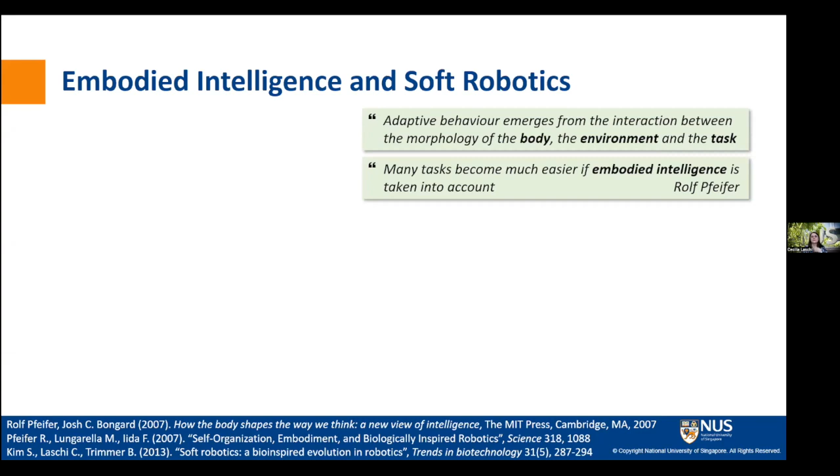My talk is about embodied intelligence and its relation with soft robotics, actually. I'm sure I don't need to define embodied intelligence too much in this community, but I just wish to recall the reasons why we consider it very interesting in robotics and why it is so important for soft robotics. And the reason for us is that if we consider embodied intelligence, adaptive behavior emerges from the interaction with the environment. So we don't have to program our robots too much. So many tasks become much easier if we take embodied intelligence into account.

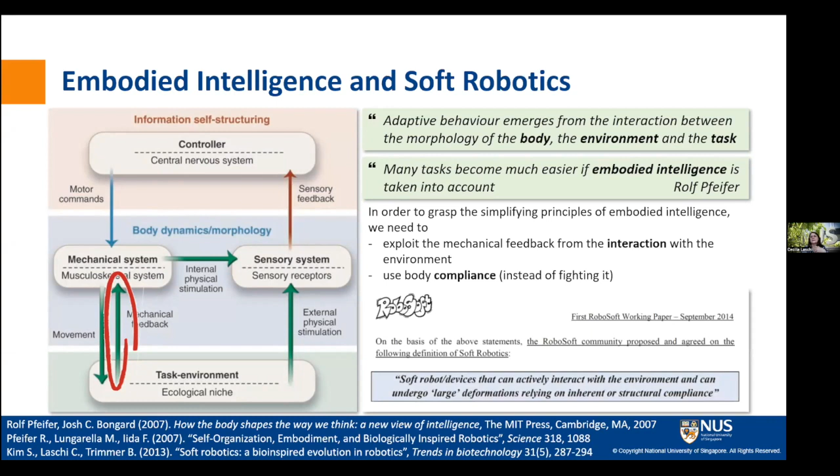And as Fumi already presented in an ideal sensory motor scheme in a robot, the important part, if we consider embodied intelligence, is the blue one. And especially this arrow, which is the mechanical feedback from the environment. So in robotics, in order to grasp this, we need to be able to use this interaction from the environment. So we need some compliance in the robot body. And this is what led to soft robotics, actually. So to robots that can undergo large deformations when they interact with the environment.

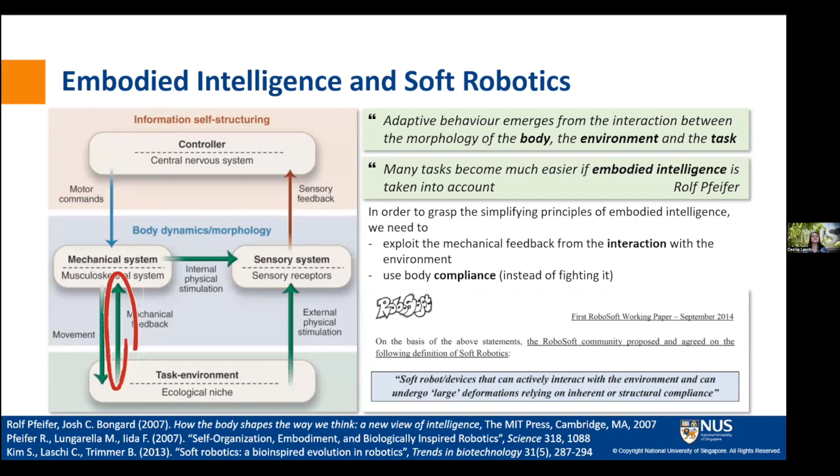And I also want to start with the summary from my first talk in this conference in the first edition, 2021. Actually, I called it Joys and Sorrows about the use of embodied intelligence in soft robotics, because I think there are a few trade-offs that we are still looking for in soft robotics when using embodied intelligence. For example, we know that embodied intelligence works in a specific ecological niche, and sometimes this niche is quite small for robotics. So the passive walker is the typical example that we use to explain this, but in robotics, we want our robots to do more tasks. So we need to be able to implement multiple ecological niches and also cognition in our robots.

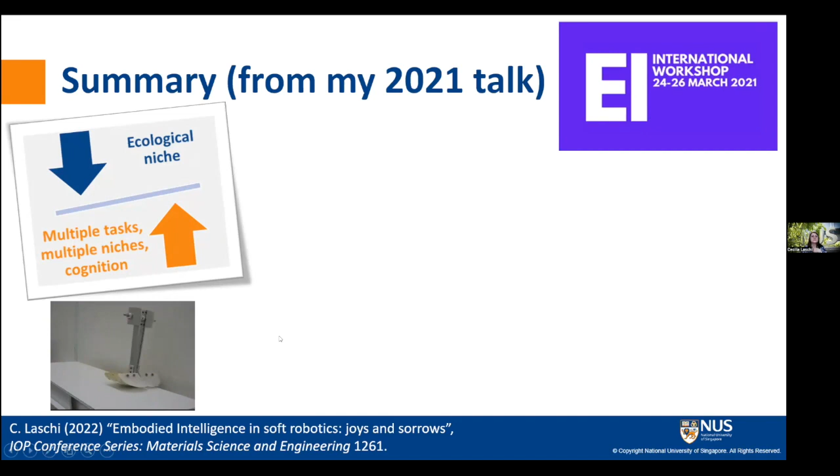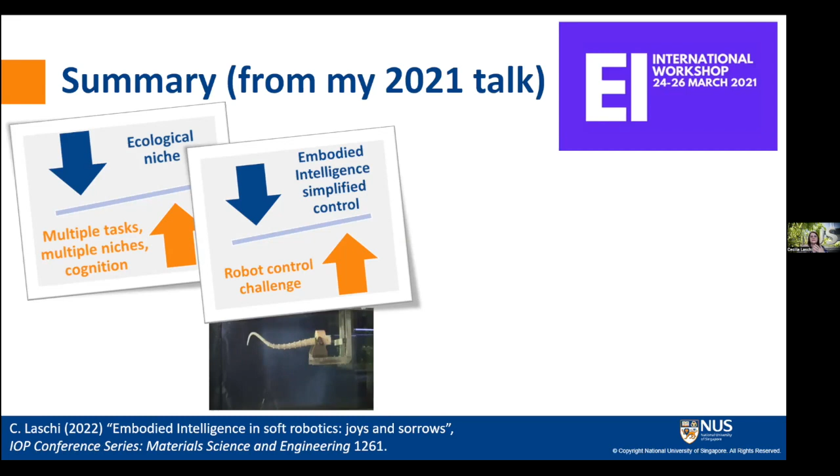On the other side, what's exciting in embodied intelligence is that we can simplify the control of our robots in terms of control parameters. But at the same time, as soon as we design a soft robot like this one, especially if it has an arm shape, we want to control it precisely. We want to control the end effector. So we say, okay, but it's difficult to control it in the traditional way. So this is also a trade-off that we need to find.

And then we said that we simplify the control of our robot behavior, the sensory motor behavior, I mean, but it works. The embodied intelligence simplification works if we take into account the morphology, the mechanical properties of the robot body, the interaction with the environment. So the design of the robot becomes more complex, in fact. And we still have a lot of nice principles for embodied intelligence, but not really an abstraction and mathematical description of them that we can use in robot design. So those principles are in most cases learned from biological models.

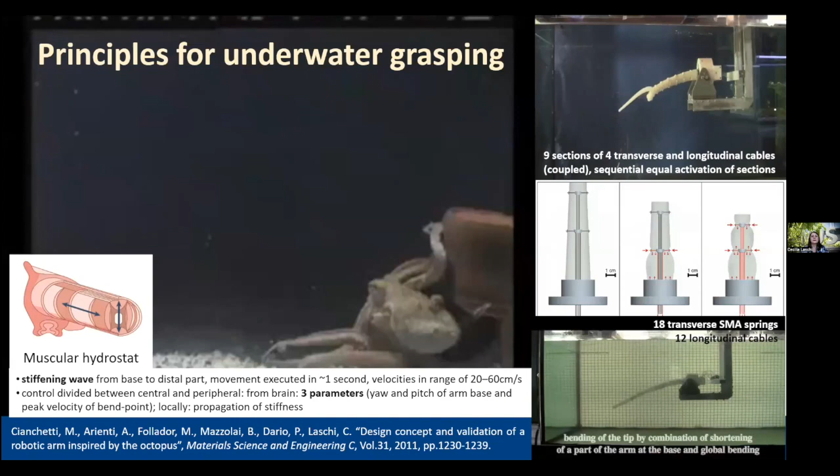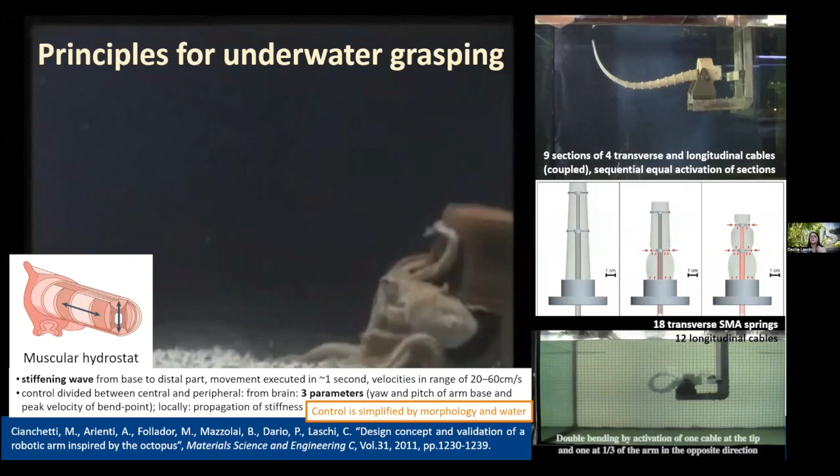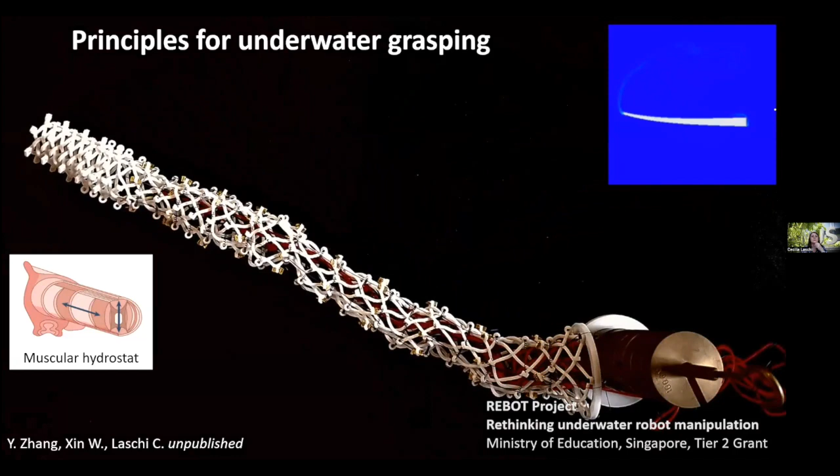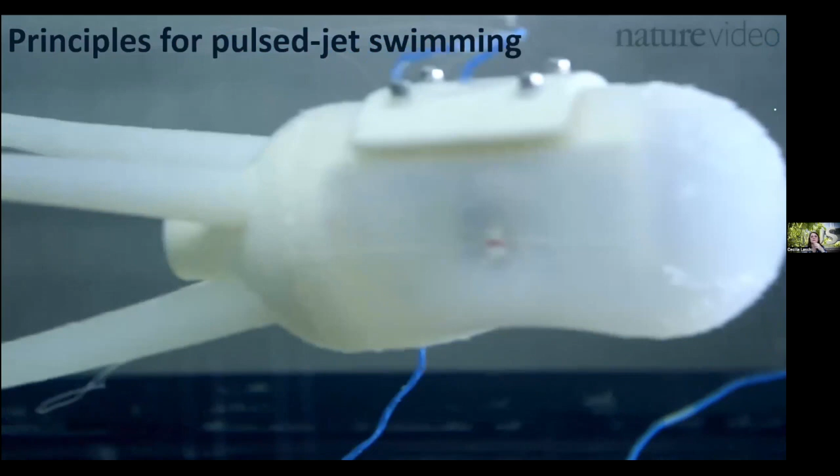So in my own research, we have been learning a lot from the octopus. For example, we found a nice principle for underwater grasping. It's a very efficient movement where control is very much simplified because of the interaction with water. And we are trying to demonstrate quantitatively how it works and how it happens. We learned about how we can walk underwater with legs and how we can swim with this pulse jet propulsion, which is very, very simple to control. Basically, control is really minimal in all those cases.

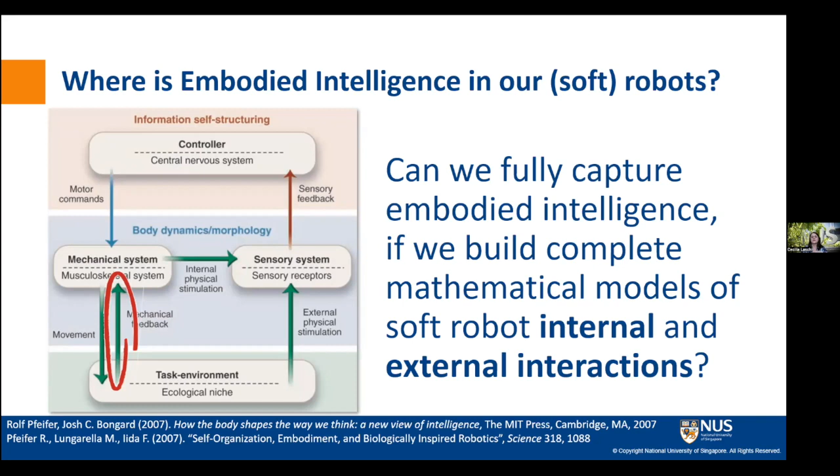So it's the model of the deformations given by actuators, but coupling them with external interactions and models of the external interactions. In a relatively simple case like our octopus here, there are already many challenges. The problems are multi-physics, multi-scale, and we want, as I mentioned, to couple internal interaction models, so what the actuator forces generate in the soft body, with external interaction models, so what the external forces generate in the soft body. And these external forces can come either from solid contacts or interaction with fluid, like in our octopus case.

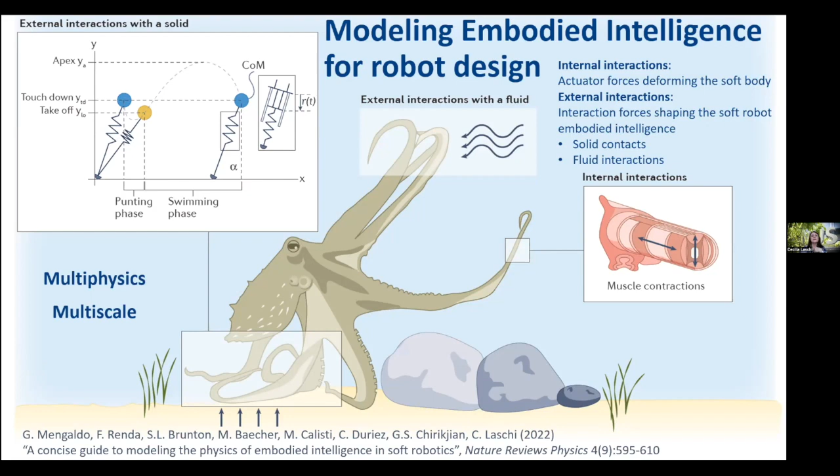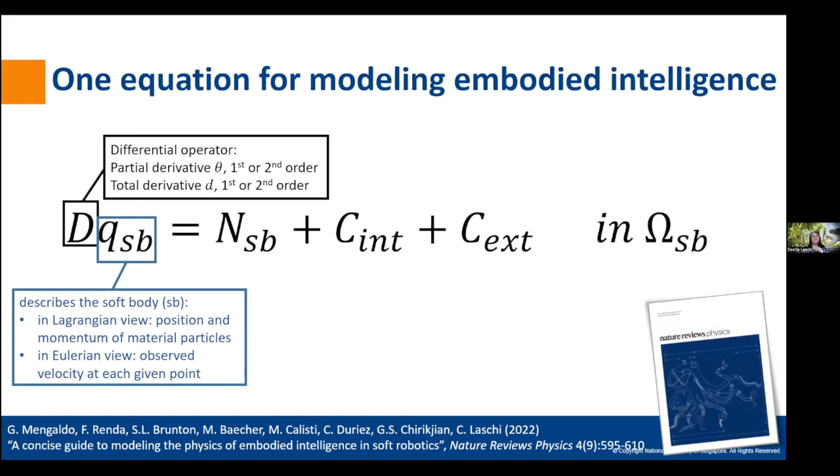So we think that actually we can try to put this into a very general mathematical framework where we just try to couple all these models. So we may describe what happens with soft robots with this differential operator, this term describing the soft body, with a nonlinear term that describes the mechanics of the soft body, and then two coupling terms.

So the first one accounts for internal interaction. So as I said, it's the action of actuators on the soft body. We are a little bit more familiar with that in robotics because this is what we need for implementing control in our robot. And this other coupling term instead accounts for external interaction. So as I said, either contacts with external solids, which is relevant for locomotion, for example, or grasping, or interaction with fluids like in swimming, all these in the soft body domain.

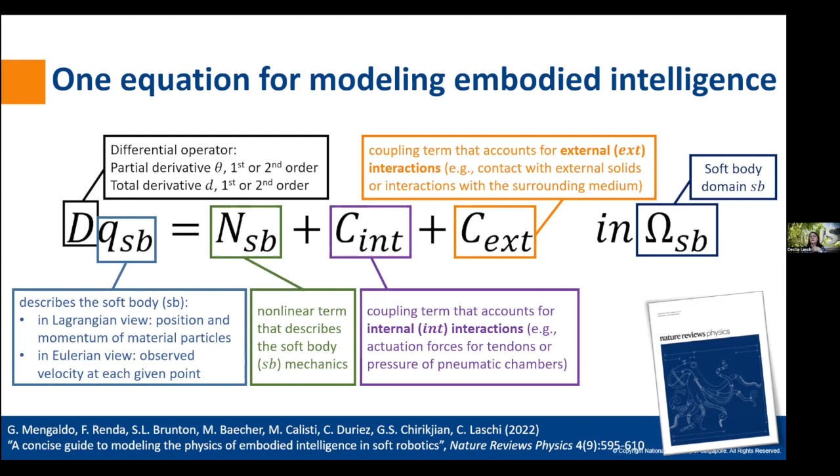So depending on the kind of approach that we want to use for developing such models, the terms in the equation assume different forms. But the message is that there are actually techniques that we can use, and generally speaking, they can either be in the realm of 3D continuum mechanics, or in the case of internal interaction, we can use other possible approaches like rod models or finite dimensional parameterization models.

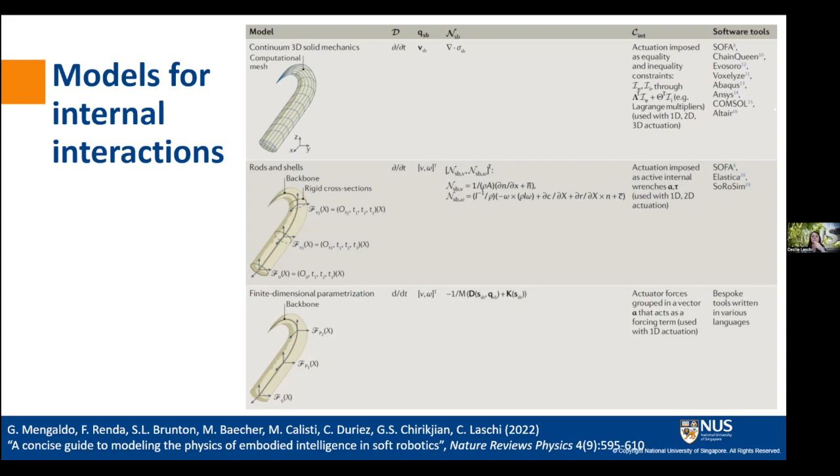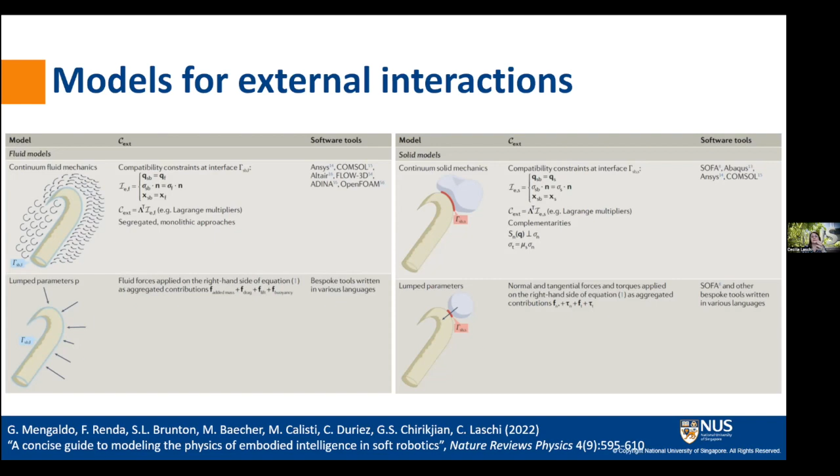For the case of external interaction as well, we can either take approaches in the realm of continuum, either fluid mechanics or solid mechanics, or approaches based on lumped parameters, again, in both cases where we sort of simplify and concentrate some key parameters in a few terms. So again, depending on the kind of approach we take, we can give a different form to the terms in our general equation, but actually it describes completely this coupling between internal and external interaction.

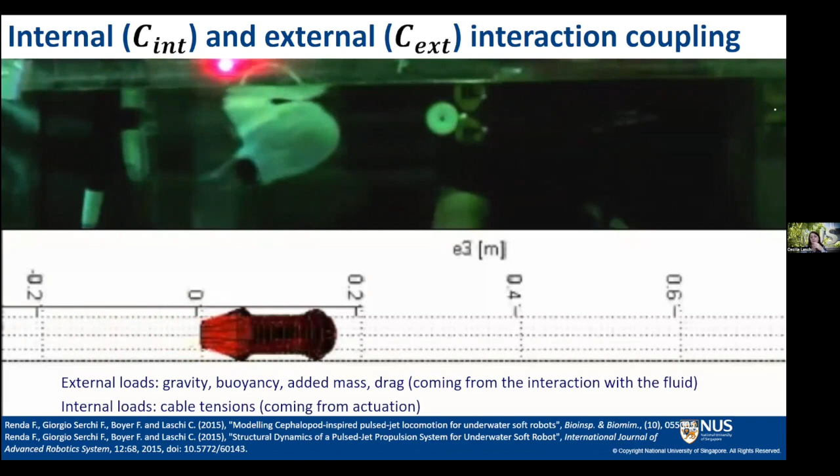And this is just an example. It's actually quite old, but here you see the coupling between the deformations given by actuators and the deformations given by the fluid dynamics, so the interaction with the fluid, and this is based on a lumped parameters approach. So all these can actually bring to model-informed design of soft robots that embed embodied intelligence.

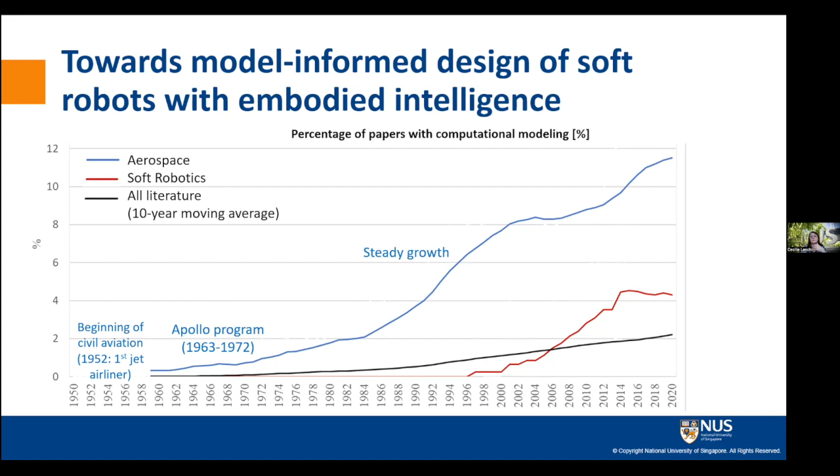The use of model-informed design, computational models, has been happening in other fields. What you see here is the percentage of papers with computational modeling in different disciplines. So aerospace is in blue. The black line is a reference for all literature, because the use of computational modeling has been growing in all disciplines actually. So in aerospace, we see that we have a growth, and this corresponds to a growth over the field itself, from the beginning of civil aviation to the Apollo program that gave a boost and brought a steady growth, up to the reality of today, where we have space tourism already, and really hundreds of thousands of civil flights every day.

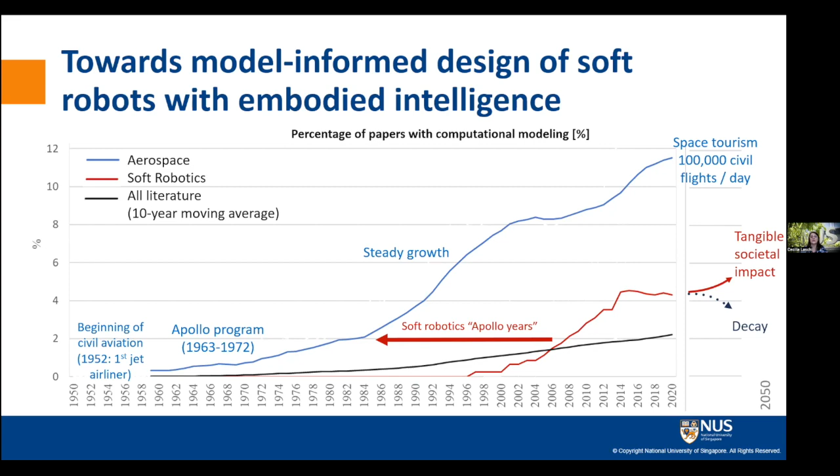So what I am arguing is that we may be at sort of the Apollo years for soft robotics if we can do this transition to model-informed design of soft robots, and then bring the discipline to a tangible societal impact, something that has been discussed in our community recently.

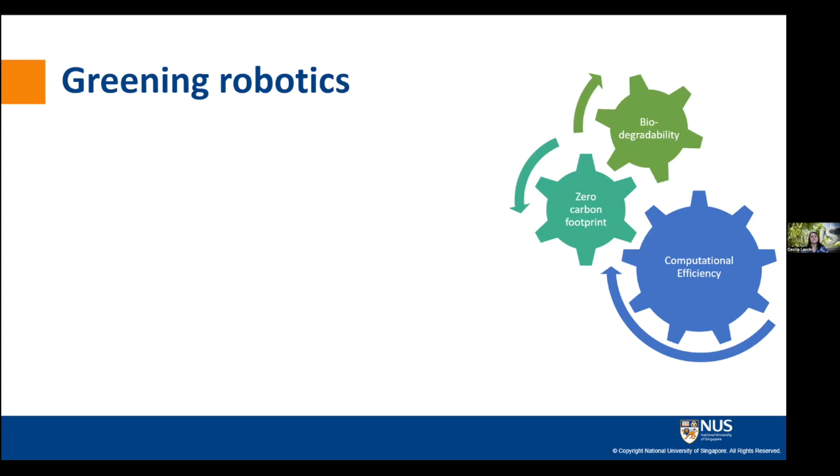There is also another aspect that I really like of the advantages in using embodied intelligence. I think that computational efficiency is really the very first step towards sustainability. We want to make robots more green and more sustainable, but I think that we tend to forget that digital processing computation has an energetic cost, and it has an impact on pollution. And if our robots are more computationally efficient, we can actually reduce their energy consumption. Nature gives us a lot of elegant, computationally frugal solutions, and embodied intelligence is definitely one of them.

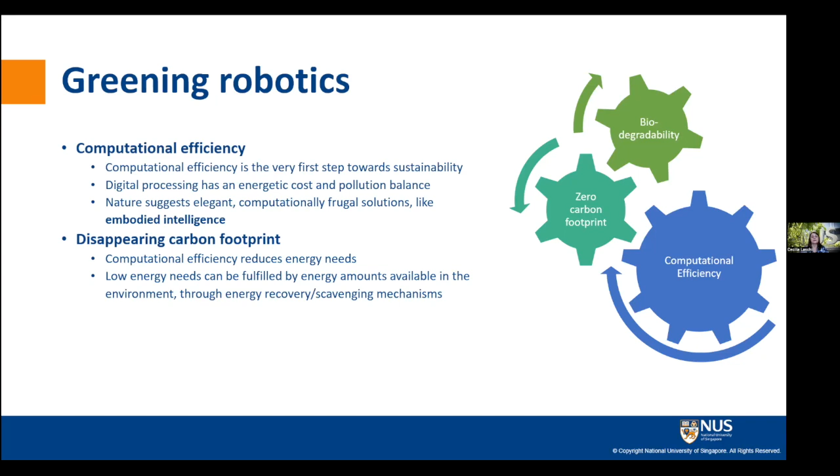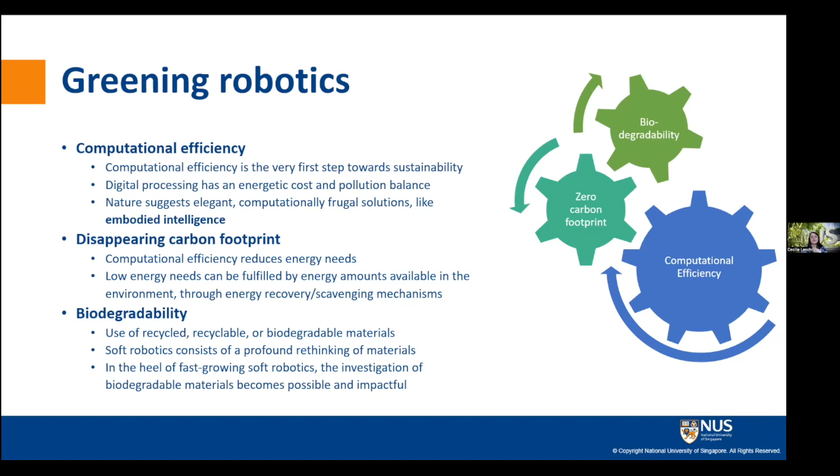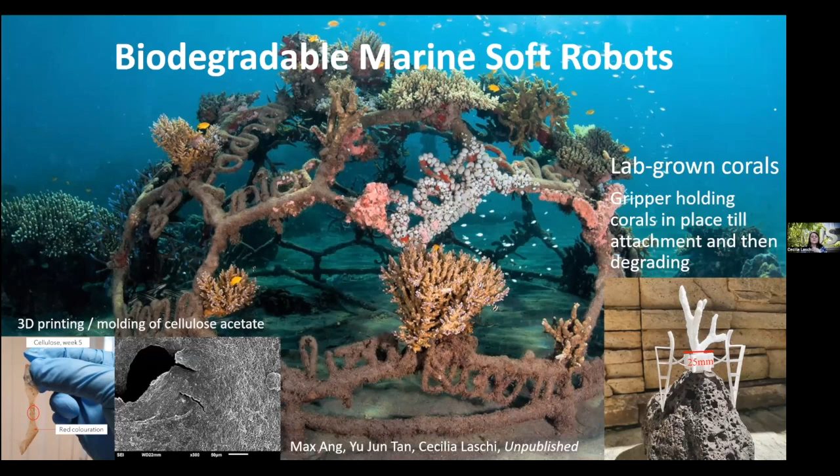So if we reduce the energy needs of our robot, we can also think of some other ways of powering our robots, and we may think of having them find energy in the environment with some sort of energy recovery, scavenging mechanisms. And of course, it has to be coupled with biodegradability, or at least recyclability. But this is also very good with soft robotics, because we made this profound rethinking of materials for building robots, so we can definitely investigate how to use biodegradable materials here. And this is something we started in our university, especially for marine applications, where this aspect is especially relevant.

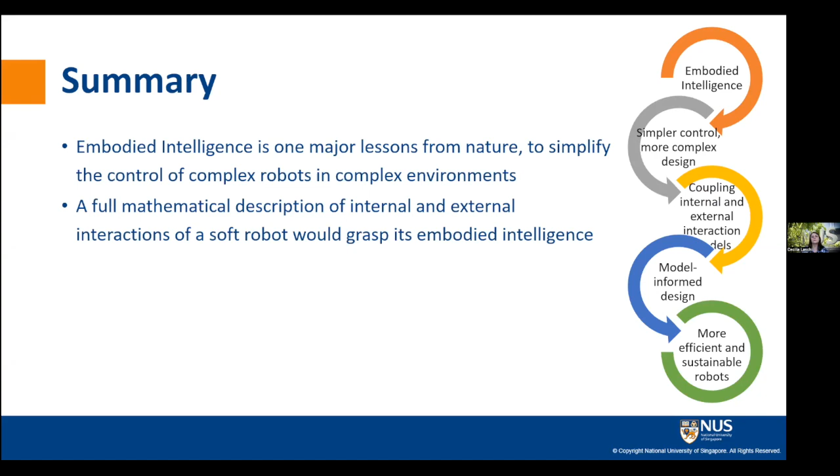So my summary is a bit more positive than the one I started with. Embodied intelligence is definitely one of the major lessons that we can take from nature. And as I said, in robotics, this is exciting for simplifying the control and making our robots complex, with complex behavior in complex environments, but simple to control. And maybe we can really grasp embodied intelligence if we can couple mathematical description of internal interaction with external interactions. And this would bring a leap forward of soft robotics as a discipline toward model-informed design. And finally, this can also improve the sustainability of robots by reducing the computational cost, the energy needs, and with the use of energy scavenging methods.